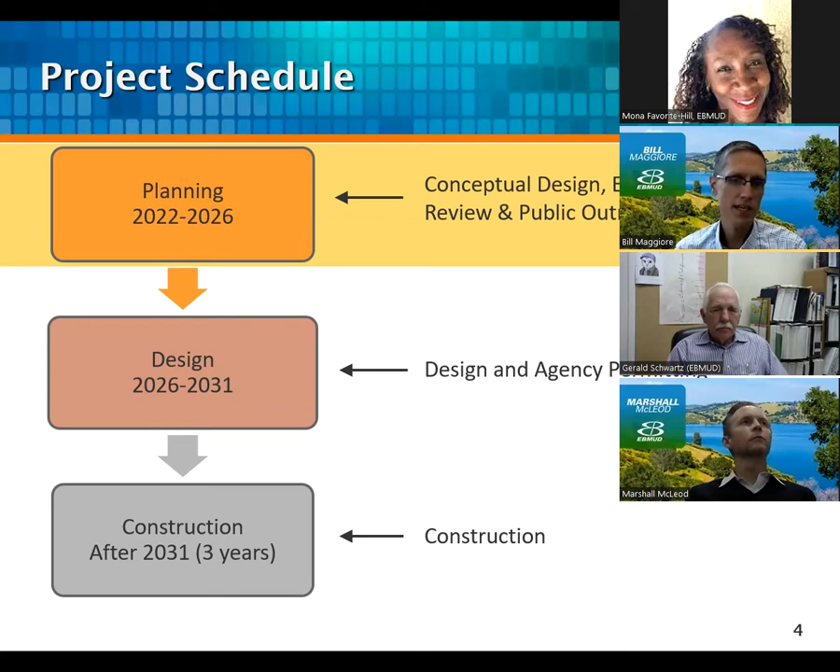Again, my name is Bill Maggiore. I am the senior civil engineer, and I report to David Renstrom, the manager of East Bay MUD's planning division, who is here tonight. Also with us tonight is senior civil engineer Marshall McLeod, who is responsible for the design of the project, who will co-present with me tonight. He reports to division manager of pipeline design, Carlton Chan, who is also here. We are also assisted by Gerald Schwartz from Community Affairs, and we also have consultants helping us on the project: WSP, who is preparing the conceptual design, and Panorama Environmental, who is conducting the preliminary environmental review for the project.

To understand the need and details behind the project, I'll explain a bit how East Bay MUD's water system works.

This figure shows East Bay MUD's water supply system, which I'm going to walk you through. The scale of this map shows the East Bay MUD service area on the left, which is on the east side of San Francisco Bay, and on the right side of the map is the Sierra Nevada mountains.

East Bay MUD gets 90% of its water supply from runoff from the Mokelumne River watershed. The runoff is collected and temporarily stored in Pardee Reservoir and Comanche Reservoir near Jackson, California. Comanche Reservoir provides downstream flows in the lower Mokelumne River for fishery, downstream diverters, and flows into the Delta, as well as provides flood control, power generation, and recreation. EBMUD's water supply is delivered from Pardee Reservoir through the outlet tower shown in the photo.

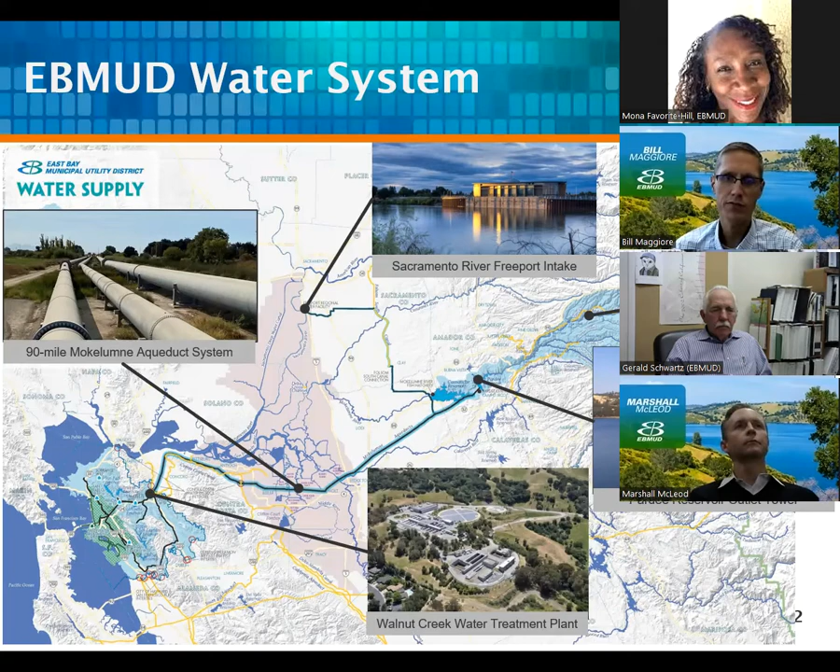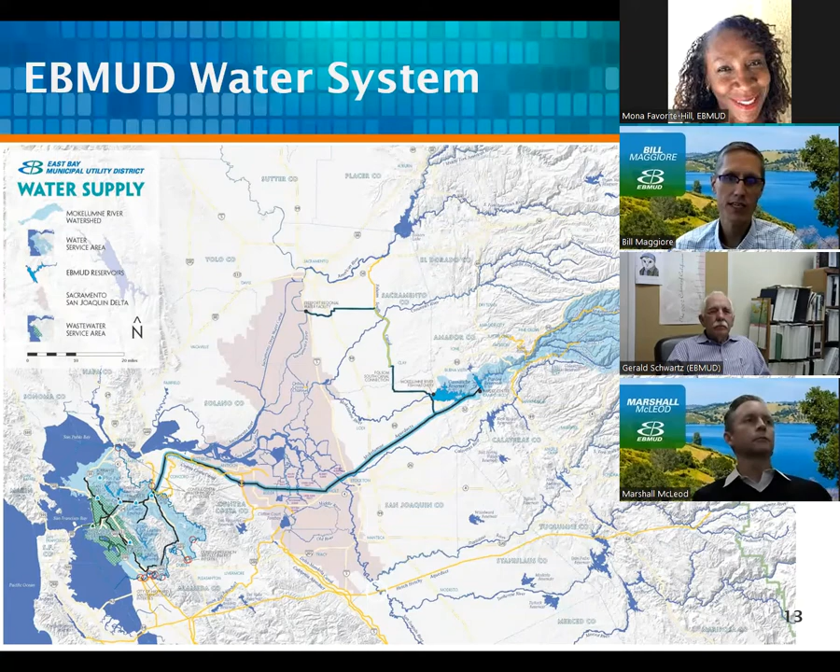Now, the Mokelumne Aqueducts Resiliency project that we are here tonight to discuss would be located in the vicinity of the Sacramento-San Joaquin Delta, as shown in the figure here. And now I'm going to hand the presentation over to Marshall McLeod, who is responsible for the design, and he's going to discuss the location, the need for the project, and the project details.

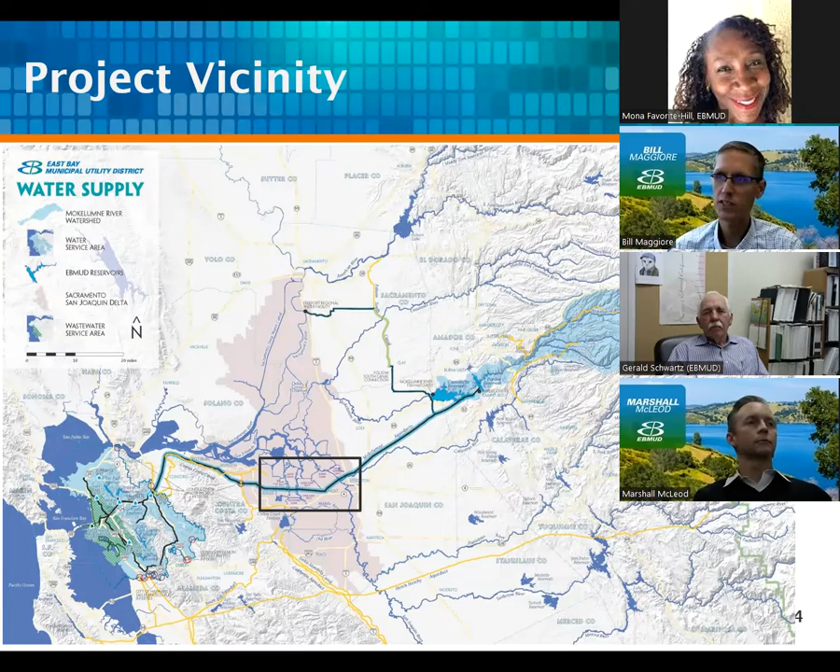Okay, thank you, Bill. My name is Marshall McLeod, and I'm the Senior Civil Engineer managing the design phase of this project. Next slide, please.

This slide shows the alignment of the Mokelumne Aqueducts within the Delta. The Mokelumne Aqueducts are 90 miles long, and of this, 16 miles are crossing the Delta. The aqueducts are 3 large steel pipelines shown in gray where they are buried, and in blue where they are installed above ground on pile-supported bents, a distance of about 10 miles.

They are installed above ground due to the unstable soils in the Delta. There are also 3 underwater river crossings shown here for the Old, Middle, and San Joaquin rivers.

Now, what is the Delta? The Delta is a system of low-lying tracts of agricultural land surrounded by rivers and channels. The land is protected from the water by levees. Beginning about 150 years ago, these levees were built by farmers to prevent flooding and to reclaim the fertile farmland.

They are constructed of native soils by construction methods of the time, such as clamshell dredging and manual methods. While these native soils are excellent for agriculture, they do not provide good materials for levee barriers meant to continuously contain water. The Delta has over 1,000 miles of levees. The perimeter levees protecting the Mokelumne Aqueducts are shown here on this map with a dotted orange line.

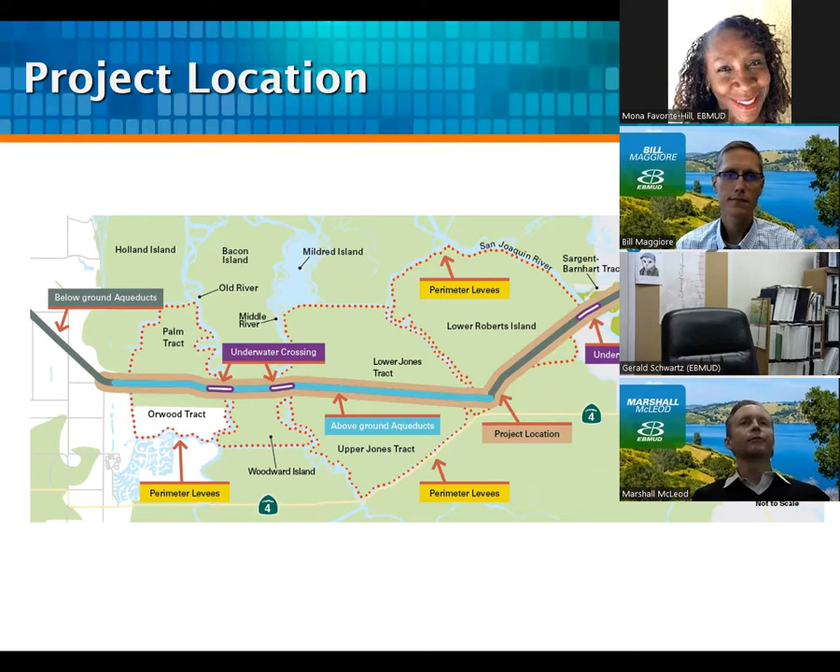The most vulnerable aqueduct is Mokelumne No. 1, built in the 1920s. However, Mokelumne No. 2, constructed in the 1940s, is also showing signs of age in the Delta. Mokelumne No. 3 was built in the 1960s, and seismic upgrades were completed in 2005 within the Delta.

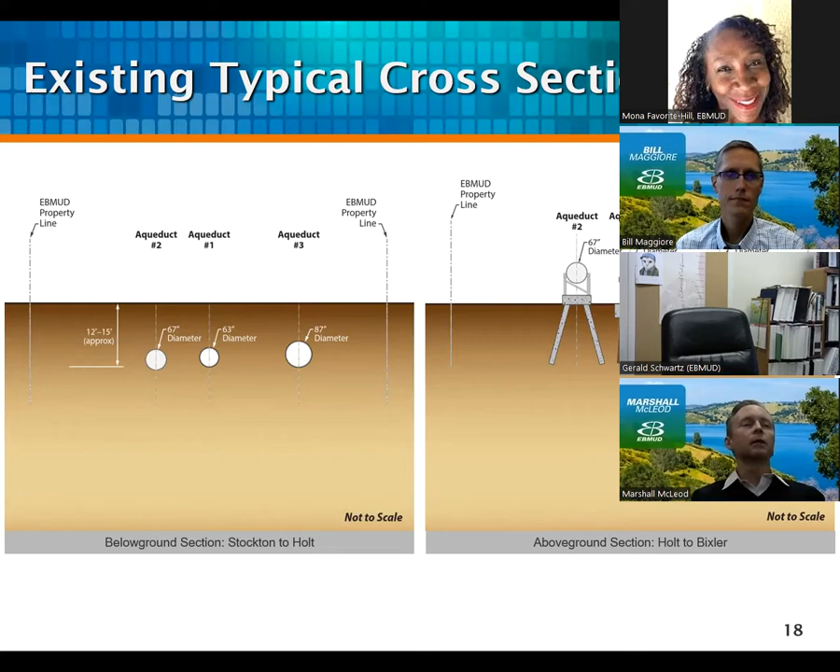Next slide, please. So now I'm going to present the need for the project. Next slide, please.

In the Delta, we have aging pipelines protected by aging levees. The aqueducts are vulnerable to damage from both flooding and earthquake hazards. There are small earthquake faults in the Delta, but the largest seismic sources are the large faults to the west, such as the Hayward and Calaveras faults.

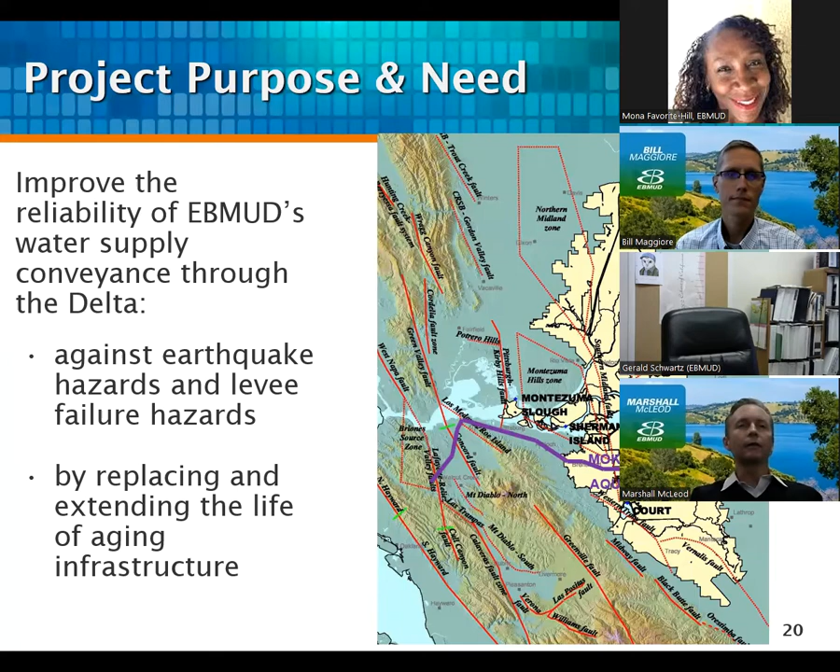I'm going to present some of the flood and earthquake hazards to these critical pipelines in the Delta, and then present how this project will mitigate the risk. Next slide, please.

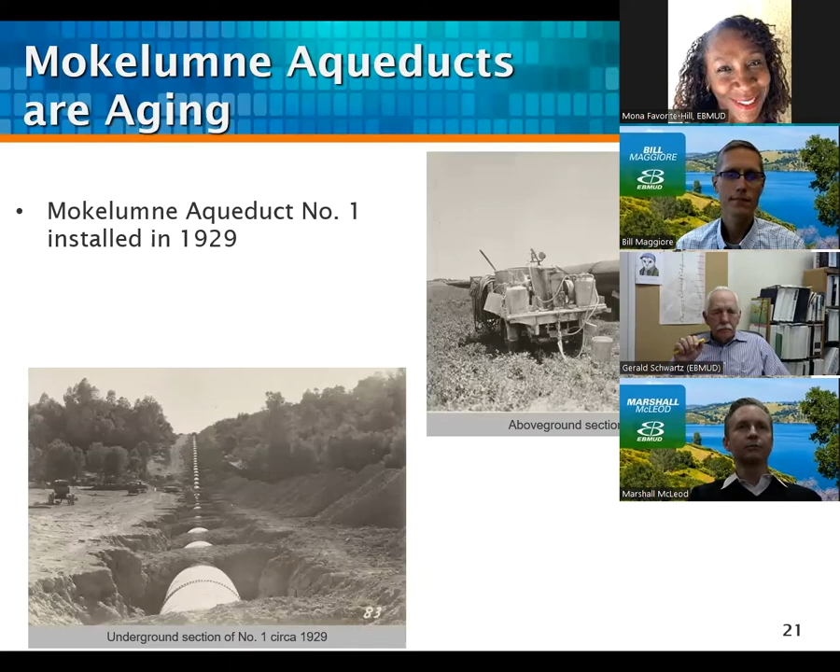Next slide, please. The previous photos are a stark contrast to the current conditions. Ground surface has subsided over 8 feet within the aqueduct alignment in the delta. Ground subsidence is a direct result of farming activities which oxidize the thick layer of peat soils in the delta and increase compaction and wind erosion.

This ground subsidence is causing pile degradation and differential settlement, which is in turn causing damage to the pipelines. Also, the loss of lateral support on the piles makes them more vulnerable during an earthquake.

For Mokelumne number 1, we have only replaced 4 out of the 50 temperature anchor structures, which are settling due to pile degradation. A temperature anchor is shown in the upper right photo. In addition to the temperature anchors, there are also over 1,700 support bents that are also degrading.

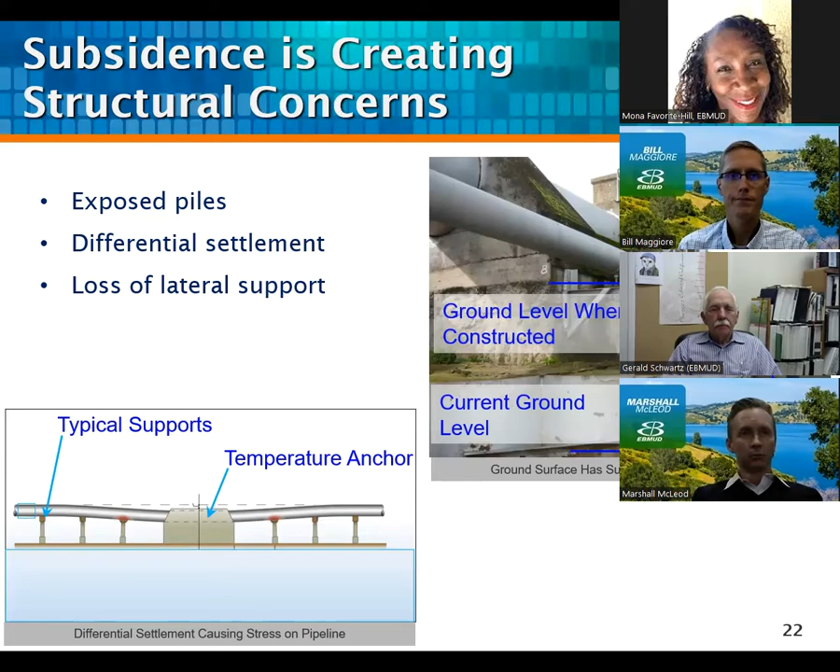Of greater concern is the impact of liquefaction on our aging perimeter levees. Levees are susceptible to lateral spreading when the underlying soils liquefy. Numerous locations of lateral spreading could result in widespread flooding in the delta.

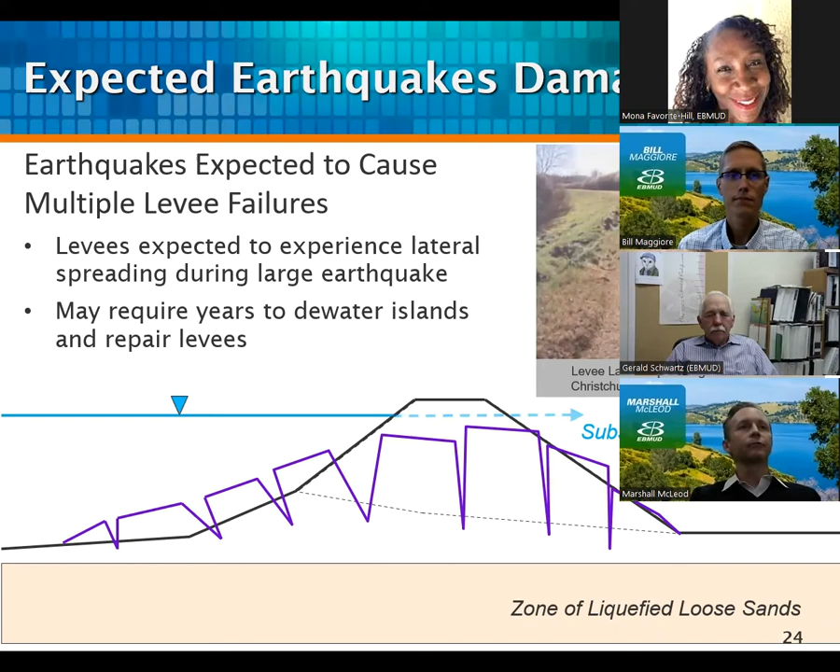Now, absent of earthquakes or overtopping flood events, the levees in the delta are still vulnerable to failure, as demonstrated in 1980 and 2004 sunny day failures.

The photo on the left shows the impact of the 1980 event when a levee failed on Lower Jones Tract. The flood water caused the railroad embankment in the lower portion of the photo to fail. The Mokelumne Aqueducts are shown in the upper part of the photo parallel to the railroad tracks. This was a close call that nearly took all 3 pipelines out of service.

The photo on the right shows levee repair activities at the 2004 breach location on Upper Jones Tract.

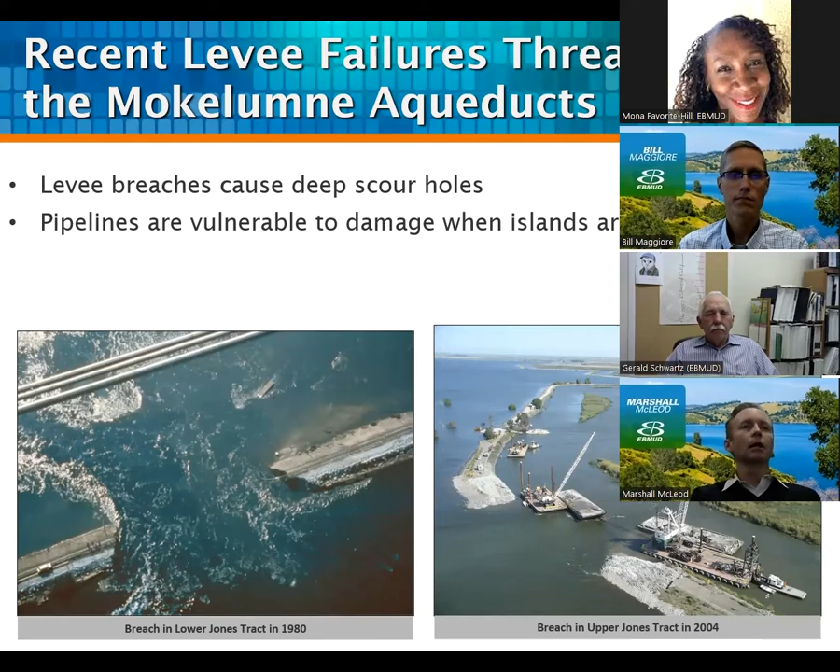Now, these levee failures cause large scour holes due to the erosive force of the incoming floodwater. The photo on the left was taken after the levee repair was completed and the island dewatered after the 2004 event. This scour hole measured approximately 2,000 feet long and 80 feet deep.

The scour depth is well below the depth of the pile foundations of all 3 aqueducts, and this would have taken all 3 pipelines out of service had the breach occurred closer to the alignment. Instead, all 3 pipelines were submerged, as you see in the right-hand photo.

Our pipelines were not designed for submerged service. They were vulnerable to damage from wave action, floating debris, buoyancy if they happen to be drained for maintenance, and corrosion. All 3 pipelines had to be recoated after the 2004 event due to corrosion damage.

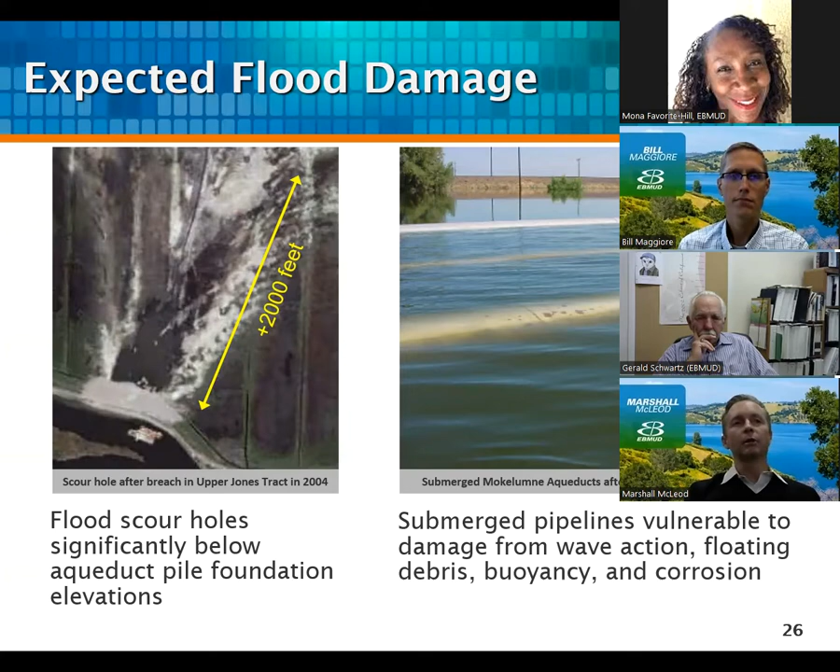Now I'm going to describe the conceptual design of the Mokelumne Aqueducts Resiliency project.

In order to avoid the flood and earthquake hazards at the surface, EBMUD plans to construct a deep tunnel within the EBMUD right-of-way. This tunnel will be approximately 16.5 miles long with a welded steel carrier pipeline inside, sized for the full design flow capacity.

We will also remove or abandon Mokelumne Aqueducts number 1 and 2 within the delta, and we will upgrade and maintain Mokelumne Aqueduct number 3 for operational flexibility and tunnel outages.

The proposed tunnel will be approximately 100 feet deep and the bore diameter will be approximately 15 feet. The cross-section on the left shows the proposed design for the buried portion of the alignment between Stockton and Holt.

Mokelumne Aqueducts 1 and 2 buried pipelines will be abandoned in place and filled with grout to prevent future collapse hazards. Mokelumne number 3 will remain in service, and the deep tunnel is located below these pipelines, within the East Bay Mud right-of-way.

The cross-section on the right shows the proposed design for the portion of the alignment where the existing aqueducts are installed above ground on pile-supported bents. Mokelumne number 1 and 2 will be demolished and removed. The existing piles will be cut off approximately 5 feet below the ground surface and abandoned in place.

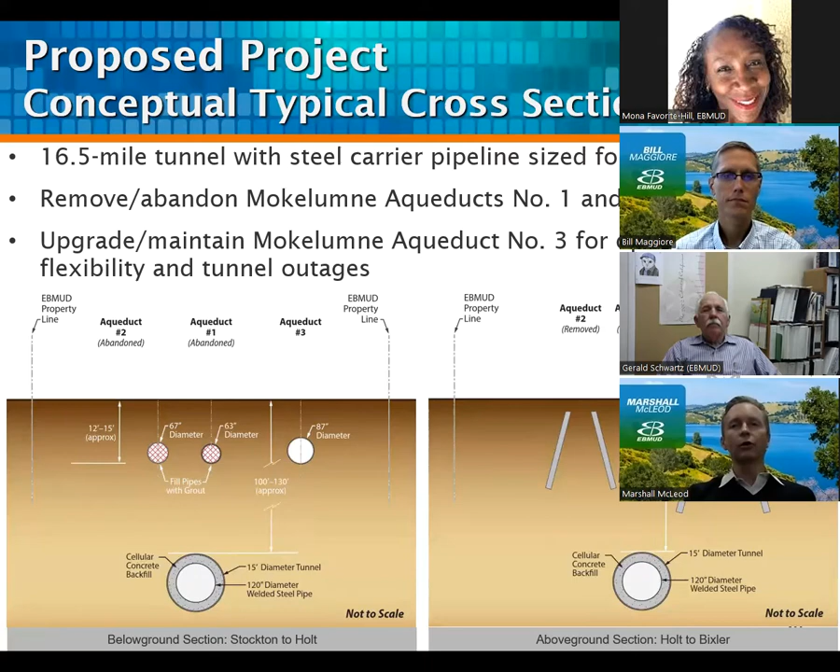Mokelumne number 3 will remain in service above ground. The deep tunnel is located below the pile supports within the East Bay Mud right-of-way.

Now the tunnel will be installed in soft ground by a tunnel boring machine, or TBM. As the TBM advances, it will erect precast concrete segments to form a ring for initial ground support, as shown in the photo on the left.

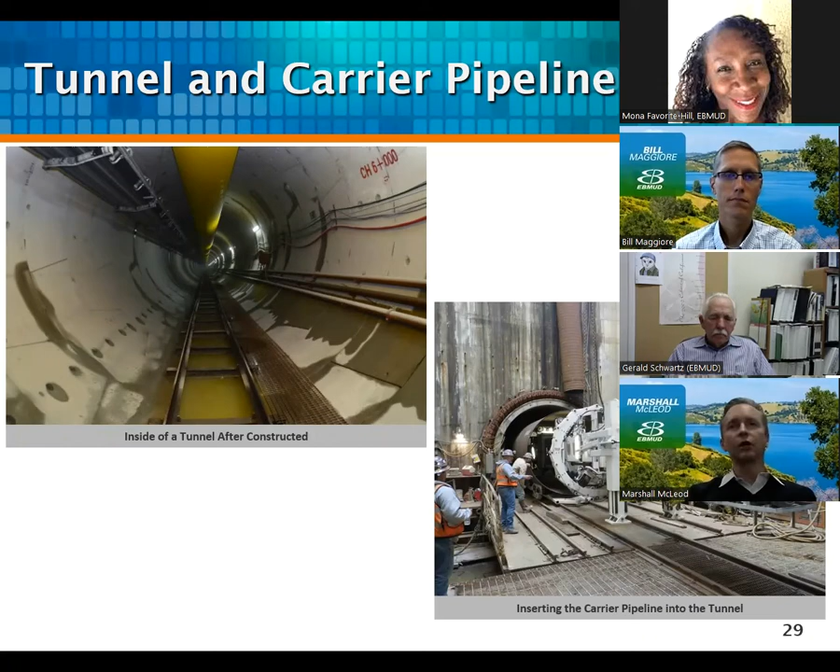In our case, because the pressure is relatively high from Pardee Reservoir, we will also be installing a 120-inch welded steel carrier pipeline inside. The lower right photo shows a similar installation by SFPUC under the San Francisco Bay.

Now, in order to construct the tunnel by TBM, we'll be installing 4 temporary construction shafts. These will be located in Stockton, Holt, West Jones Tract, and Bixler.

Now, there are 2 types of tunnel construction shafts. The launch shaft is where the TBM is lowered down to the design elevation. As the TBM advances, precast concrete segments are lowered down to be brought to the machine for installation.

Simultaneously, excavated earth is conveyed from the front of the TBM and brought back to the launch shaft for removal and disposal. Therefore, the launch shafts are the sites with the most construction activities and truck traffic.

The main construction activities at the reception shafts are lifting and removal of the TBM, and then welded steel pipeline work to connect the new carrier pipeline to the existing aqueducts on either side of the delta.

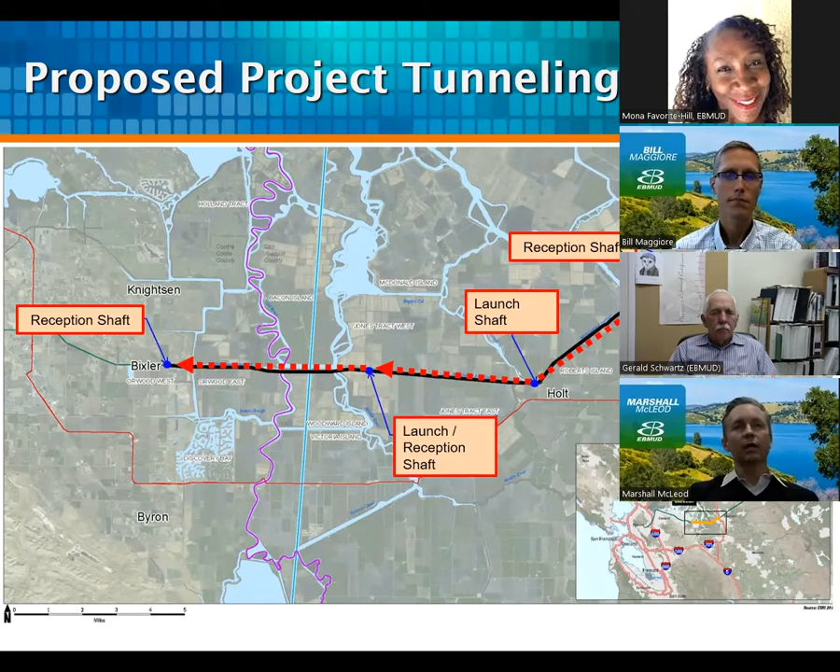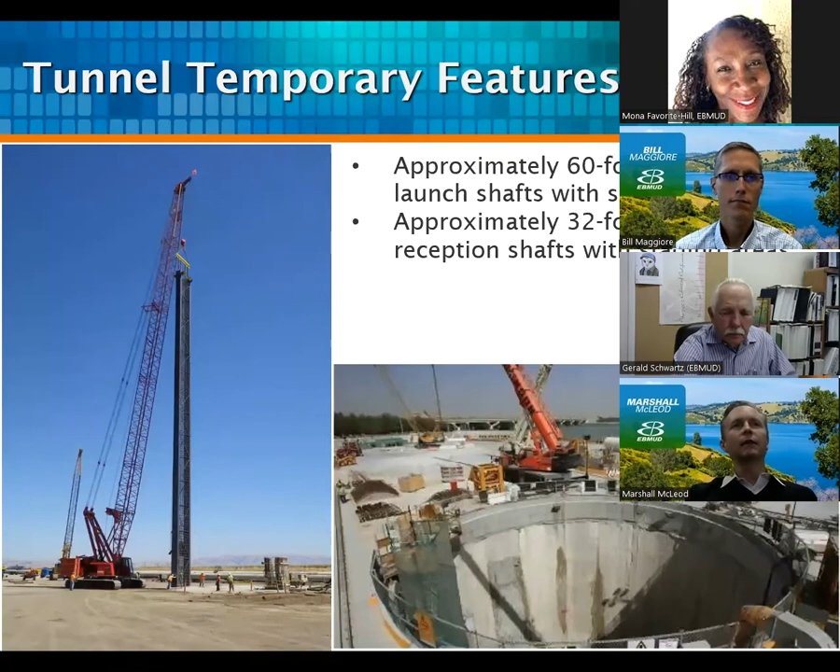The photo on the left shows a typical shaft construction in progress. The photo on the right shows a typical launch shaft in operation. The shafts are typically round, but they could be rectangular. The approximate anticipated dimensions are 60-foot diameter launch shafts and 32-foot diameter reception shafts.

The photo on the left shows typical staging operations of the precast concrete tunnel segments near a launch shaft. The upper right photo shows excavated material leaving the screw conveyor of a TBM, which will be deposited in a muck car or a conveyor belt to be brought back to the launch shaft for disposal. The lower right photo shows soil management activities near a launch shaft.

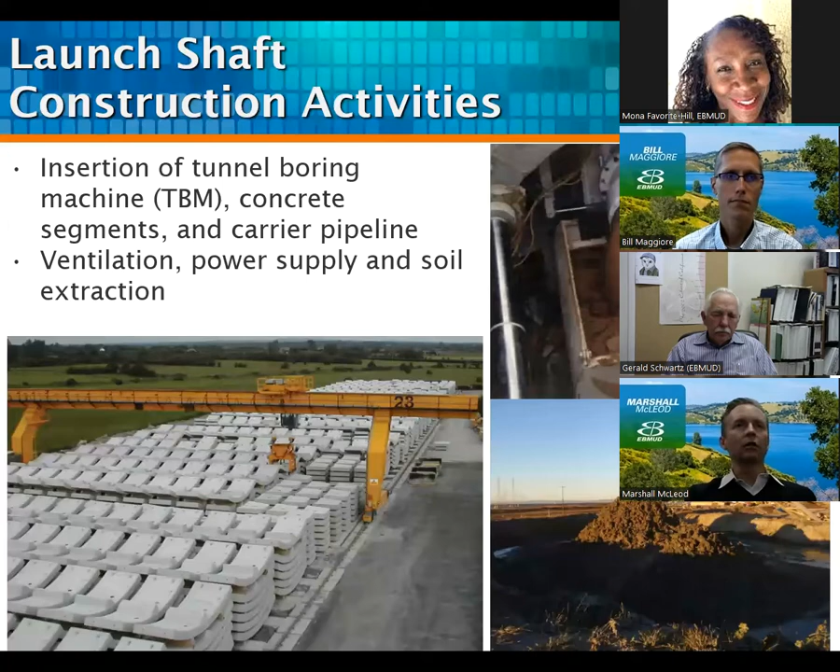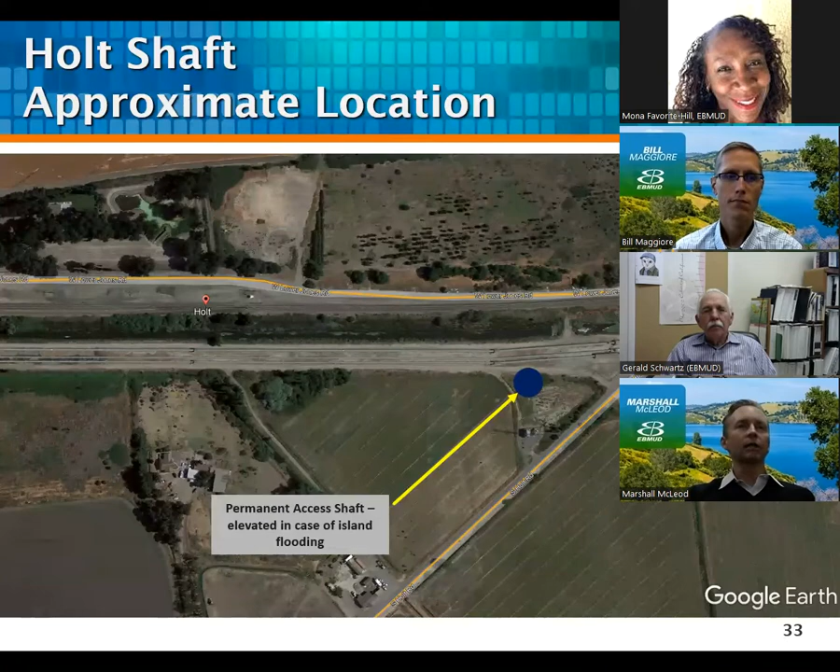This aerial photo shows the location of the Holt launch shaft. After completing the tunnel, the permanent feature will be an access shaft for long-term maintenance activities such as inspections.

Similar to the Holt site, this aerial photo shows the location of the Jones Tract West launch shaft, which will also have a permanent access shaft after completion of the tunnel construction.

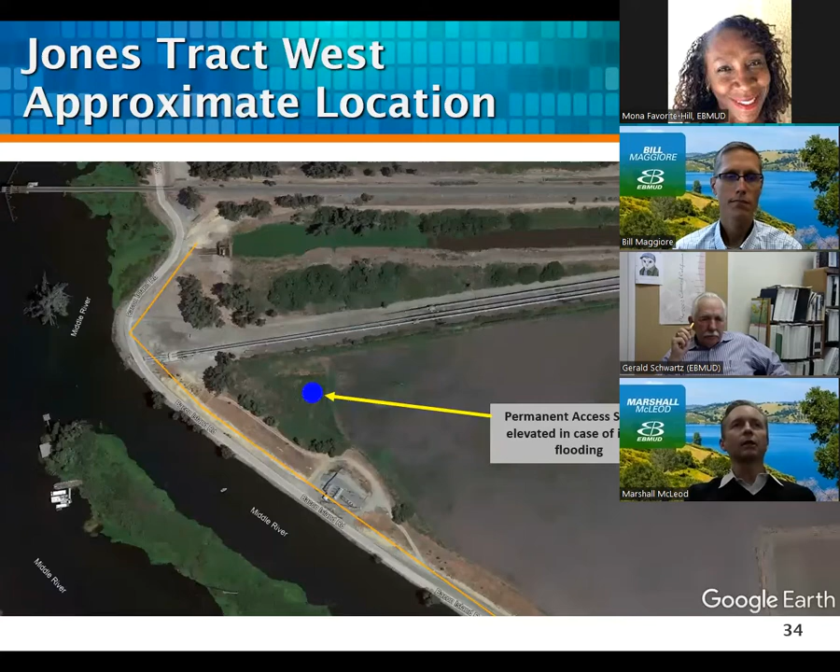As previously discussed, the reception shafts will be smaller and will have less construction activities. For the Bixler and Stockton reception shafts, the TBM will be removed at the completion of the drive, and then the new welded steel carrier pipeline will be connected to the existing 3 Mokelumne aqueducts with buried steel pipes and valves. The photo here shows a typical TBM being lifted.

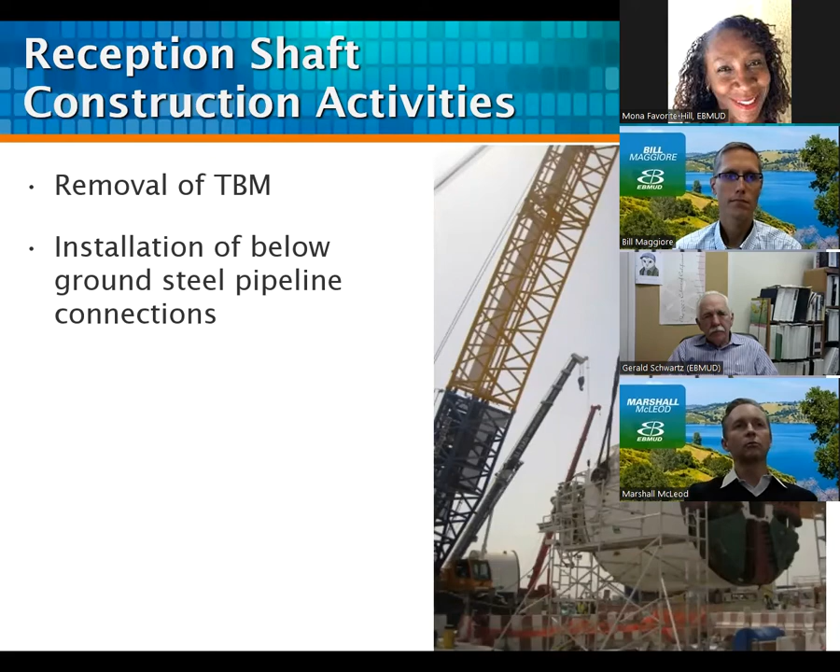This aerial photo shows the location of the Bixler reception shaft, which will also have a permanent access shaft after the completion of the tunnel construction, as well as buried welded steel pipelines and valves. This site is completely contained within the East Bay Mud Bixler Maintenance Yard property.

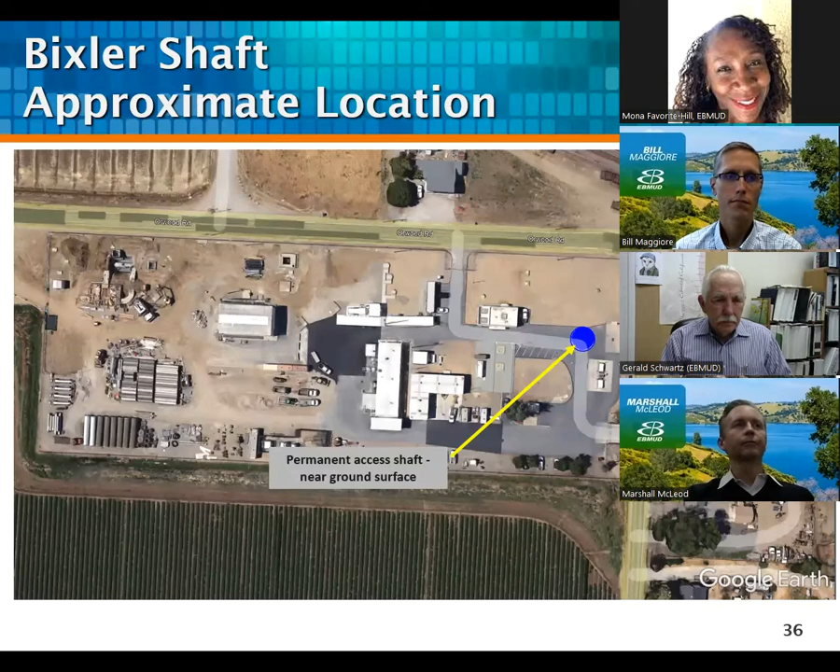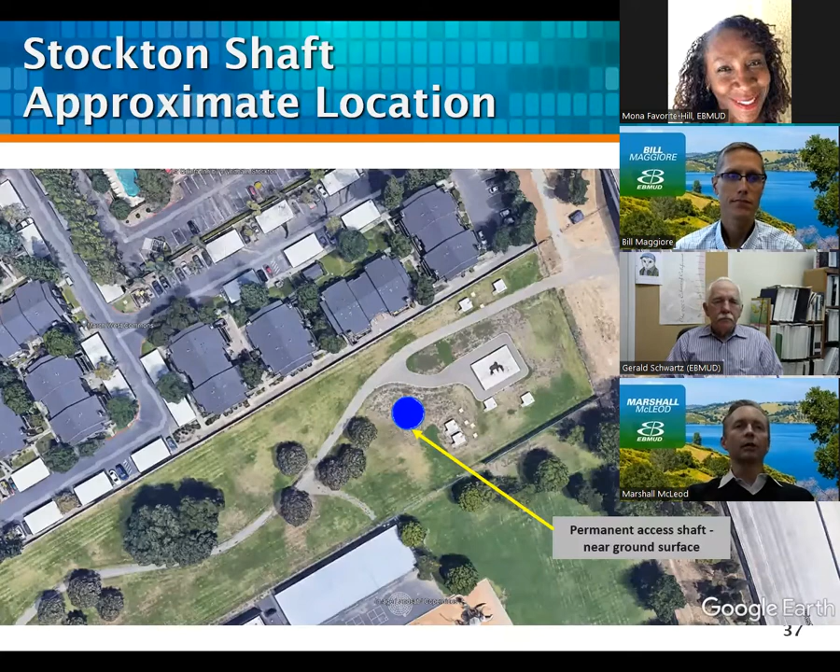So now I'm going to go over the environmental impact report process and schedule. Please note an environmental impact report is also known as the EIR, so we may use that term interchangeably. What exactly is an EIR? Well, the purpose of an EIR is to inform the public of the environmental consequences of a project. Agencies are required to prepare an EIR if there are potential environmental impacts to the community or environment as a result of the project.

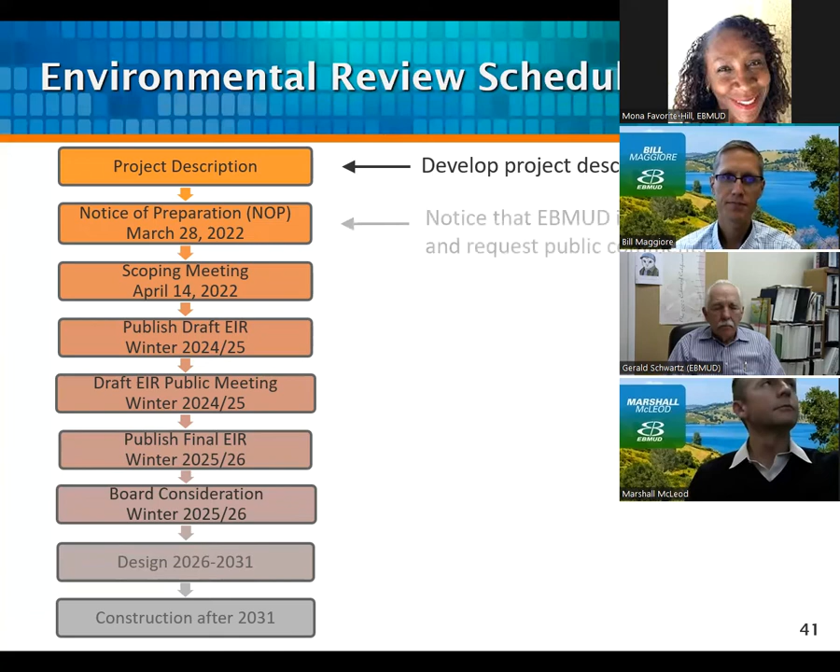So where are we on the schedule? As I previously mentioned, we are at the beginning of the planning phase, where we recently prepared the project description that Marshall just discussed. On March 28th, we published the NOP, short for the Notice of Preparation, to provide public notice that East Bay Mud is preparing an EIR for the project.

The goal of the NOP is to receive comments on the EIR scope over the course of 30 days. We are in the middle of the 30-day NOP period. Here we are on April 14th, having our first community meeting, and we are here to receive public input on the scoping of the EIR and our project.

Moving ahead to winter 2024-2025, we will be publishing the draft EIR, and that's when we will hold additional public meetings to describe the findings of the draft EIR and get additional input on the project. We are in the early stage of the project now, and things are very conceptual. Over the next 2.5 to 3 years, we will be developing more concrete detail on the project and its effects.

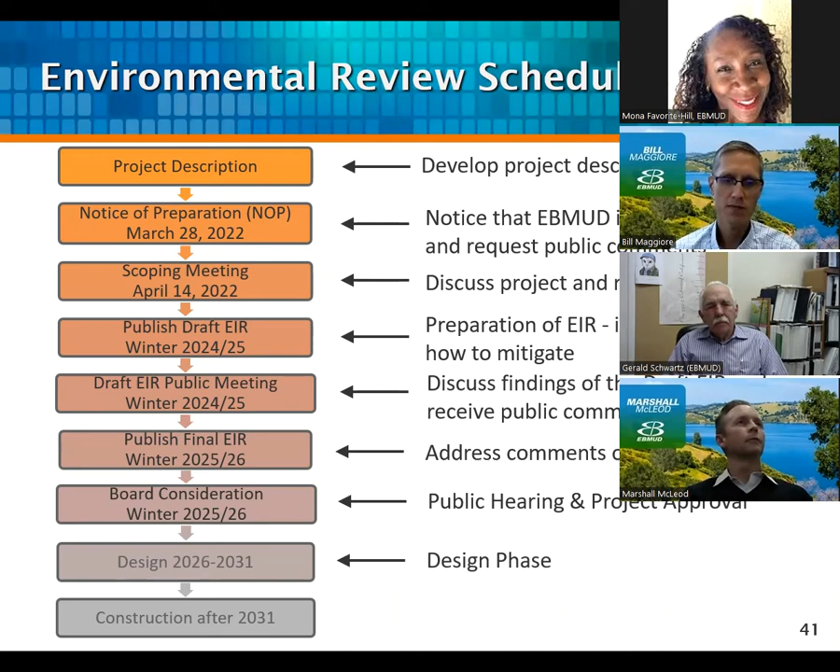Based on the comments we receive in response to the draft EIR and those meetings, we will finalize the EIR in the following year, and present that to East Bay Mud's board of directors for their consideration. If all goes well, the board will approve the project and we will move into the design phase, which should take place over 3 to 4 years. The construction phase is tentatively scheduled to follow and last 3 years.

So what are we going to do next? We are going to collect all the comments we receive here tonight and consider them as we further develop the project and prepare the environmental impact report. We will prepare a more detailed conceptual design for the project, and perform additional outreach to stakeholder agencies and property owners we may want to acquire temporary or permanent property from. We will then perform environmental studies, including noise, traffic, biological, and air quality studies to gather data supporting preparation of the EIR. Then we will prepare the draft EIR and release it for public review in winter 2024-25.

Now we're going to discuss how to get your questions answered or provide comments. First of all, thank you very much for your time. If you want more technical information, you can go to the website shown on the screen: www.ebmud.com/MARP, or MARP for short.

I have posted the initial study, which provides some initial analysis on the environmental effects of the project. Also included is the notice of preparation letter sent to public agencies, which includes some site figures. Within a couple of days, I will post this presentation, the slides, as well as the video to the webpage. Your comments are important and will help us prepare an EIR that addresses your issues and concerns, so we can plan this important project to minimize environmental and community impacts.